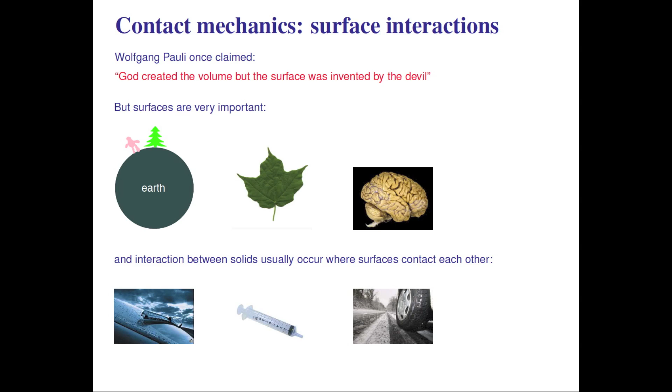Understanding these interactions is a very demanding task, which was also addressed by Wolfgang Pauli, who received the Nobel Prize in Physics in 1945. He said that God made the bulk, but surfaces were invented by the devil. This in a very beautiful way illustrates that working with surfaces can be a very demanding problem. The problem with surfaces and what makes them so very complicated is that they are not smooth, but that they are rough. And not only that, to make things even more complicated, they have roughness on different length scales. Let's see what that actually means.

When we look, for example, at the balls from this ball bearing or the cylinder surface, they look perfectly smooth to the naked eye as illustrated in the figure in the lower left corner. We cannot observe any surface roughness. But when we start to magnify into one region of the ball, for example using an optical microscope, one will at some magnification start to observe surface roughness. But not enough. If we now look closer at one of these asperities, which appears smooth at the given magnification, after increasing the magnification even more, one will observe additional roughness at this even smaller length scale. So we have additional, smaller scale or micro roughness on top of the macro roughness.

This procedure can now be repeated even further, and it usually continues all the way to atomic distances. In some applications, for example a road surface, one can observe surface roughness starting at millimeter or centimeter size all the way down to nanometer scale roughness components. This means one may have to include up to 7 decades in length scale of surface roughness in the contact mechanics study.

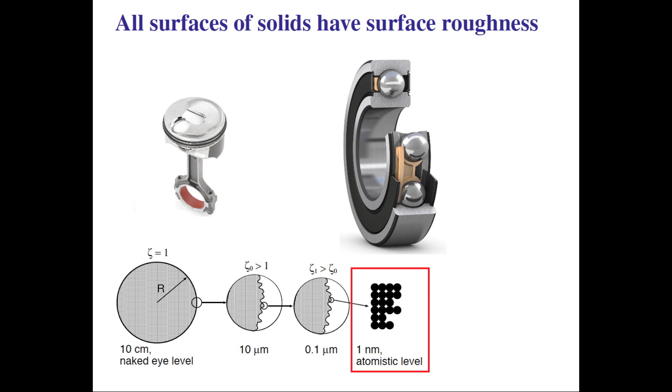Let us now try to understand what we actually mean when we talk about contact mechanics. In the context of contact mechanics, we try to study the deformation of two solids which are squeezed into contact so that they touch each other at one or more points. Because of surface roughness, this becomes a tough problem, as you can already see from this figure. Usually one studies an elastic solid with a smooth surface, for example a rubber block, squeezed into contact with a rigid solid with surface roughness. This rigid solid could be, for example, a road surface.

The basic problems that we want to understand in contact mechanics are the following. You can see that because of roughness the contact area is not complete, but that the two solids touch each other only on top of some high asperities. In this context, one of the most important questions is how big is the area of real contact. This is of great importance for many different applications in nature and technology.

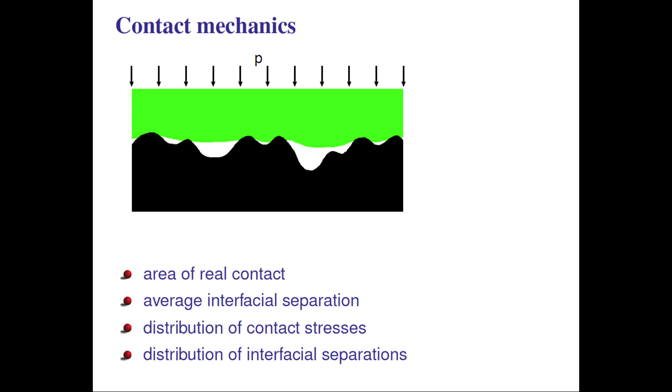Another important quantity is the average interfacial separation between the two solids. But not only the average separation, also the distribution of interfacial separations, which is of importance for the leakage of seals. And last but not least, the squeezing pressure on the rubber block is supported in the area of real contact, and one would like to understand the distribution of the contact stresses acting here. These are basically the 4 most important questions in the context of contact mechanics. We have already learned that surface roughness occurs on many different length scales, and this is also the reason why understanding contact mechanics is such a difficult problem.

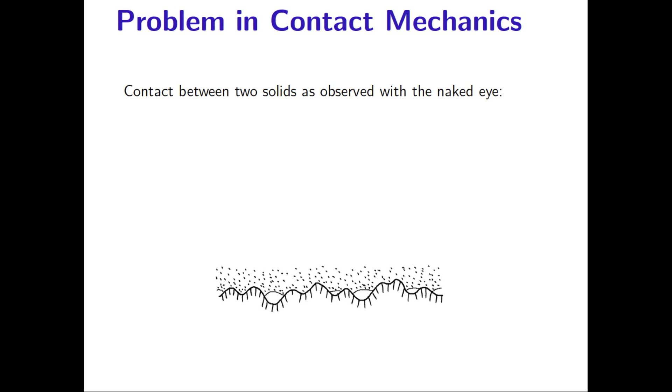However, when we look at one of these contact regions a little bit closer, by increasing the magnification, say using an optical microscope, we will observe additional, smaller scale roughness, and we see that what seemed to be full contact before now breaks up into smaller regions of contact and regions of non-contact.

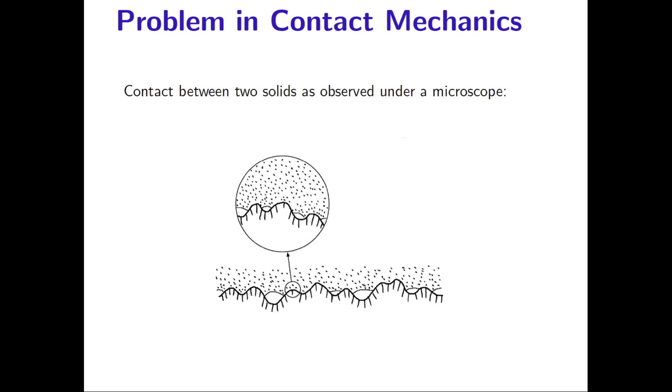This picture now continues all the way up to the highest magnification of order atomic distances as surface roughness occurs to these length scales. Please note that only taking into account all length scales will give you the correct answer to the question how large your real area of contact is. In this context, one cannot neglect any length scale from the analysis.

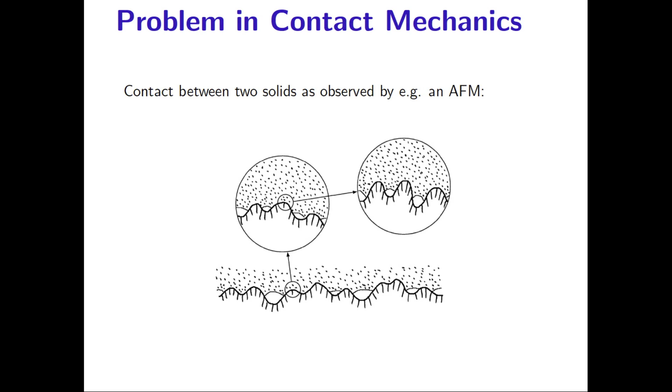However, many other theories neglect this fact, and they simplify the picture by taking care of roughness only on a single or a limited number of length scales. Another reason to not neglect any length scale is that depending on the problem one is interested in, different effects can become important or manifest themselves at different length scales.

This is shown in this graph where the wavelength lambda of a particular roughness component is plotted on the x-axis. With wavelength we mean the following. We model the profile of the measured surface roughness as sinusoidal waves with different wavelengths or frequencies and different amplitudes. This is called Fourier transformation and a very common approach to describe roughness, for example. Please study our lecture on Fourier transformation to learn more about this procedure.

When we now speak about a certain wavelength, we basically refer to the lateral size of a single roughness component, which also defines its length scale. Below the x-axis is the magnification for the case that we define the wavelength lambda 10^-2 meter as magnification 1 or lowest resolution possible. That means that at magnification 1 we cannot observe smaller roughness components than lambda 10^-2 meter or 1 centimeter.

Above the x-axis we show different material properties and at what length scale they may become important. Plastic deformations, for example, are important at length scales of order micrometer, while surface layering appears at much smaller length scales or higher magnification if you want. We also see that specific length scales dominate certain physical quantities, while others can be neglected. Contact resistance and contact stiffness are dominated by surface roughness with wavelength of order of 10 to 100 micrometer.

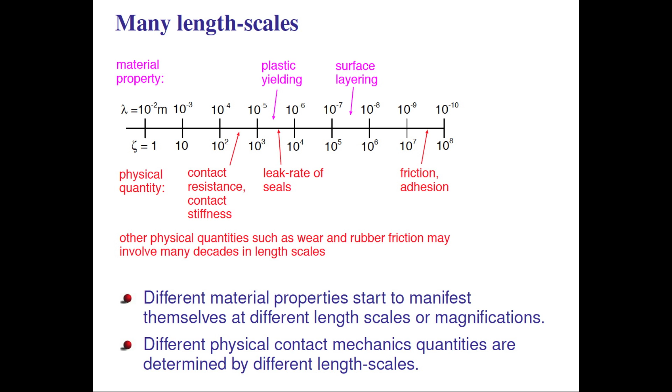The leakage of a static seal, on the other hand, is typically affected by roughness components at length scales of order micrometer. However, this is only a rough estimate, and we want to remind you again that it is of huge importance to not exclude any length scale from the problem you are trying to solve without knowing its influence. If you want to understand rubber friction or adhesion, you may need to include all surface roughness information. For road surfaces, this implies including surface roughness starting at centimeter up to atomic resolution.

To approach the problems in contact mechanics, the first thing to do is that we need to have a good description of the roughness. As we have learned now, it is not enough to have information about the roughness involved on a single or only over a limited range of length scales. However, commonly accepted and used roughness parameters like the root mean square roughness, the maximum peak height, or the skewness are usually dominated by certain length scales and do not contain surface roughness information over many length scales.

We have found that the only proper way of addressing this problem is the surface roughness power spectrum. It comprehends basically all relevant statistical properties of a randomly rough surface. One can obtain the surface roughness power spectrum directly from any measured height profile measured over a square or even along a single line. Common ways to obtain the topography are by measuring the sample using optical methods, atomic force microscopy, or stylus instruments.

When you have the height information h, which is the height away from the average plane as indicated in the figure, as a function of the lateral coordinates x and y, the power spectrum can be calculated using two different methods. One method is to take the two-dimensional Fourier transform of the height profile and then take the square of that. Another way would be to take the two-dimensional Fourier transformation of the height-height correlation function.

The Fourier transform basically transforms the height information as a function of coordinate into a new function with frequency or wave vector as argument. This is done by modeling the roughness profile as a superposition of many plane waves with varying frequency and amplitude.

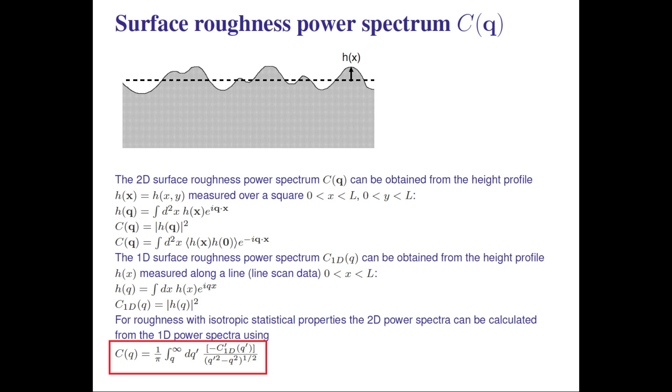For a better understanding of this procedure, we may ask you to have a look at our lecture on Fourier transformation or learn more about this in the literature. Many measuring techniques measure the height information only along a single line. However, if the surface exhibits isotropic roughness, one can calculate the one-dimensional power spectrum from the measured profile and use the formula given in the bottom of this slide to calculate the two-dimensional power spectrum from the one-dimensional.

However, when h is different from 1, it is called a self-affine fractal surface. Scaling a self-affine fractal surface with a constant factor zeta in all directions, including the height h, the magnified region appears to be much rougher. Notice that h has to be a number between 0 and 1.

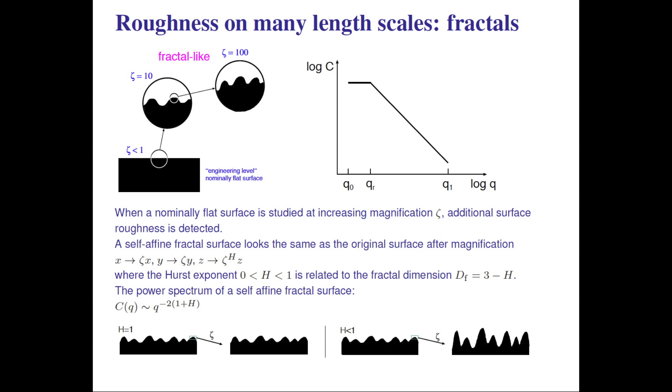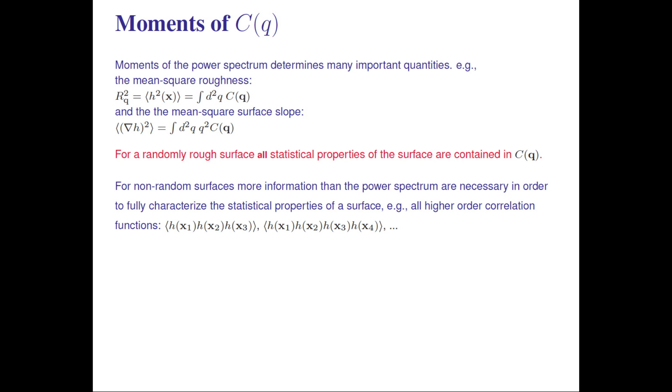However, many surfaces in nature and technology are basically randomly rough and can therefore be fully characterized by the surface roughness power spectrum. Let us now have a look at some calculated surface roughness power spectra for real surfaces. All the results shown here have actually been calculated from measured topographies. The power spectrum is always plotted in the same way. We show the power spectrum on the y-axis as a function of the wave vector q on the x-axis. Both axes are on a log scale.

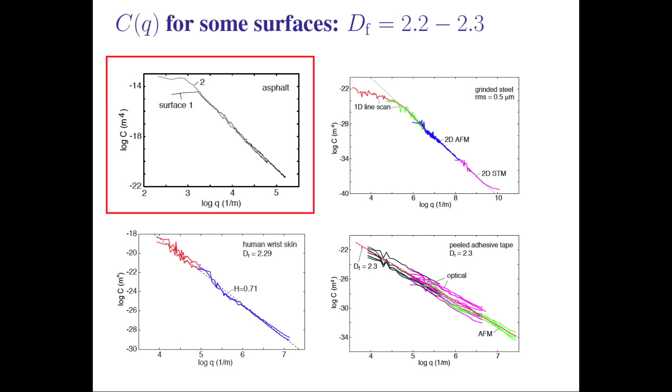Let's look again at the asphalt road surface in the upper left figure. We can see that surface 2 is rougher at small wave vectors. This means that the surface will appear rougher to the naked eye, and one may come to the conclusion that the friction of a rubber block sliding on this substrate may be higher compared to surface 1. However, experimentally it was found that surface 1 actually gives higher rubber friction. The reason for that is that its power spectrum lies above the power spectrum of surface 2 for smaller length scales. It is rougher on the microscale, resulting in higher energy dissipation in the rubber.

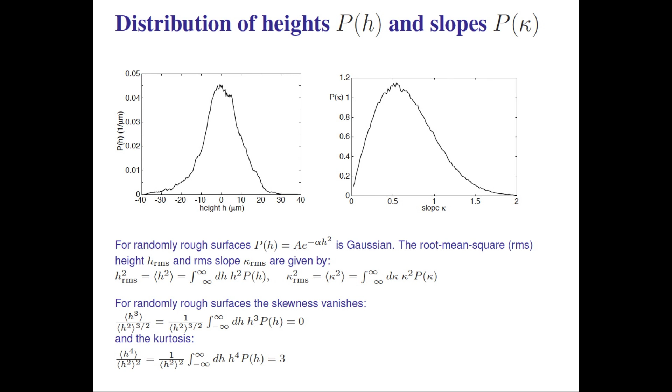On the next slide, we will discuss what to do if the skewness is not 0, because then the surface is not randomly rough and the power spectrum no longer contains all information. Note also that the two curves shown here will always differ a little bit from the ideal case. The height probability will usually not be exactly a Gaussian. The reason for that are finite size effects of the surface region you have measured on. Only by averaging over many measurements will you obtain a really Gaussian curve. We have developed a particular method to take non-randomly rough surfaces that are skewed into account in an approximate way.

We now separate the profile by cutting it at its mean plane. Then the roughness below the average plane is replaced by some profile which has the same statistical properties as the profile above the average plane. From this new profile, we can now calculate what we call the top power spectrum. If we replace the profile above the average plane, we would refer to it as the bottom power spectrum.

We now take non-randomly rough surfaces approximately into account by using the top power spectrum in the contact mechanics calculations. This can also be motivated easily. When you squeeze a rubber block against a rough substrate, you will usually not form complete contact, but only be in contact on some high asperities, and therefore the roughness in the valleys is not of importance because the rubber only probes the roughness on top of the asperities.

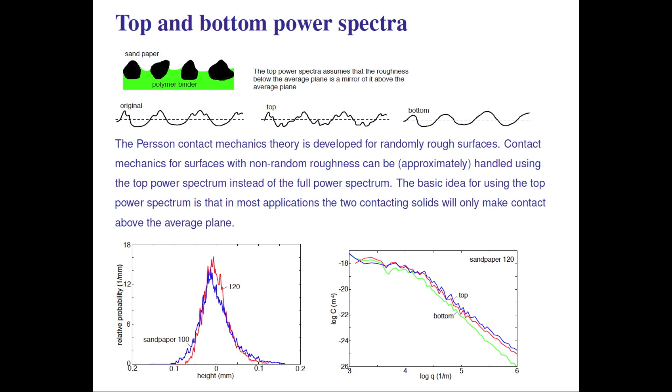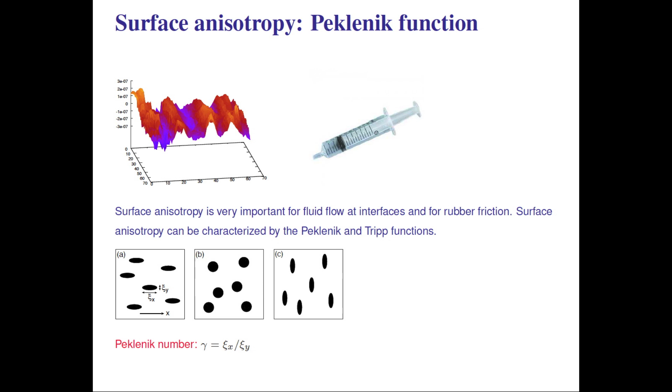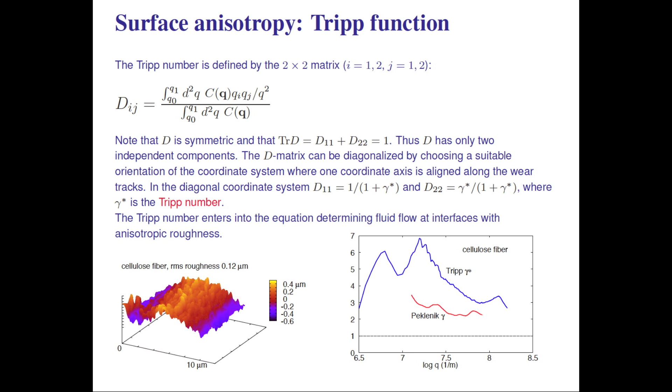If you're interested in fluid dynamics, there is another number which is even more important than the Peklenik number, and that is the Tripp number. One can relate them to each other, but we're not going into detail about that now. Usually one calculates the Tripp number from the power spectrum by relating it to the eigenvalues of the matrix shown here on the slide. This is an important number if you're interested in fluid dynamics at rough interfaces. But because we are not going to discuss fluid dynamics, we will stop here.

Let's conclude our lecture now. In this first lecture on surface roughness, we have learned that basically all surfaces are rough. One just needs to look close enough at the surface. We have also learned that surface roughness does not appear only on a single length scale. It continues on all length scales until an atomic dimension is reached. We have seen that surface roughness behaves fractal-like, meaning that if one magnifies a particular region of a roughness profile, it looks statistically the same as before magnifying it.

To describe this fractal nature of surface roughness, we have introduced the surface roughness power spectrum, which is basically the only way to describe this kind of roughness. If you have a randomly rough surface, all information is included in the power spectrum. There is nothing else to be learned. In case we have a surface with skewed roughness or anisotropic properties, there are other methods to take this into account, namely the top power spectrum as well as some other anisotropy parameters.